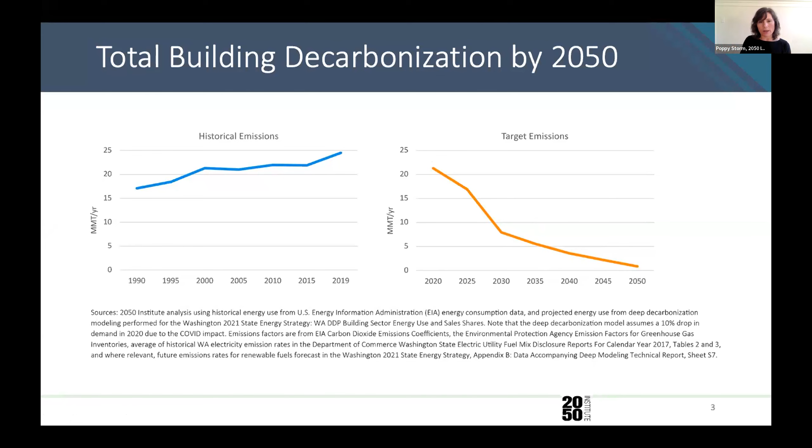And so we need really a steep ramp up in the next 30 years, and then we need to gradually replace all of the emitting equipment by 2050. So it's a big task, but we can do it if we really recognize that that is actually what the job is, and it's not incremental efficiency or half measures.

So in Washington State, we're seeing that going electrification versus the alternative, which is business as usual, or in this case of this $34 billion in savings, this is compared to going a decarbonized pipeline gas path.

So if we keep all of the lower efficiency combustion equipment in buildings, but we decarbonize the gas, that will cost $34 billion more by 2050 in cumulative terms than going electrification in buildings for space and water heating and other appliances. So $34 billion is a really significant amount, especially if it's just for one state. So this has the potential for really broad-reaching benefits.

So we really need to start thinking about it in those terms and not just be thinking about these really high first costs. We need to lower those, but we need to think about how do we distribute those costs, because we are going to be experiencing these highly distributed benefits, since most of this $34 billion is realized by individual consumers, individual housing units, and businesses in terms of reduced energy costs.

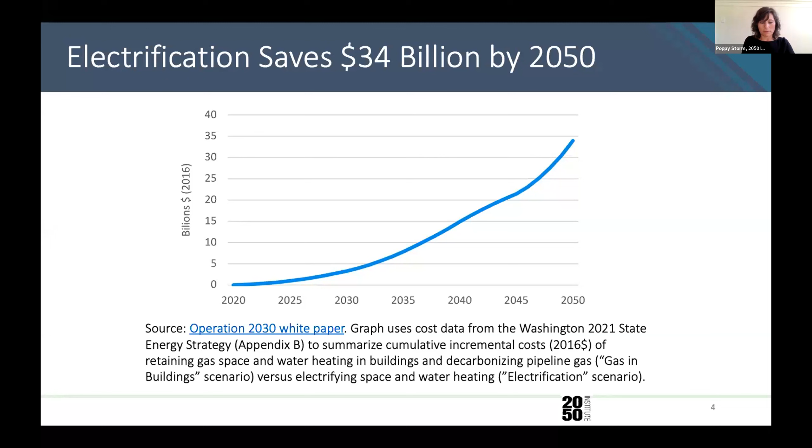So the key to this for Washington, and I'm seeing this across a lot of other studies, is that to get that building sector to be completely transitioned by 2050, the actual buildings, we need to shift the market by 2030. So we have just over 5 years to make it so that these types of strategies are the norm across the entire building sector. It can't be a niche thing anymore.

And I really don't see individual incentives getting us all the way to this shift by 2030, where every new and replacement piece of equipment is zero emissions. And in this case, it was modeled as electric equipment, high efficiency electric equipment. So we need a very big market push, and we need a whole ecosystem that delivers this.

So just quickly, I'm not going to go into the details here, but what this culminates into is that we need really clear phases. And I think we can see these phases overlapping with a lot of the other things and solutions that the other panelists are going to be describing, because everything that they're talking about is really tying into this larger transition. It's not just about how do you get it right for an individual building.

So we're really looking at getting this policy and planning platform stood up by 2025, and then a very rapid ramp up to 100% sales share of electric zero emissions equipment by 2030. And then we gradually replace all that equipment between 2030 and 2050.

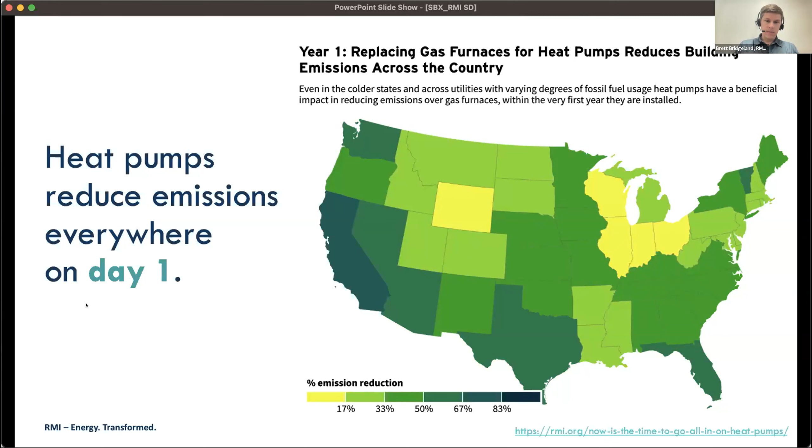Heat pumps reduce emissions everywhere across the United States on day one, in some places by a lot, in some places by perhaps more modest amounts. But the verdict is in. Heat pumps reduce emissions, and the other key part of this is that it's not just about day one. It's about how long that equipment is going to last, because that equipment's going to be in these homes and buildings for 20 plus years.

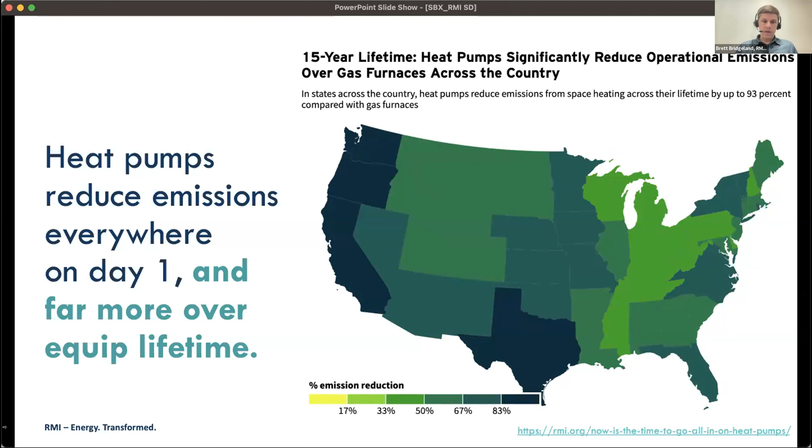And so if you look across the lifetime of emissions, even just taking a 15-year lifetime, heat pumps are going to save far more emissions compared to gas. So runaway favorite. This was looking at residential furnace replacements in particular, but assuming the same sort of efficiencies, we should see that in other larger systems as well.

The other part, as Poppy alluded to, is cost effectiveness, of course, and this is something we've been tracking, looking at new construction as an indicator. And here again, latest data is in, and what we see is cost effectiveness across all climate zones for going all electric in new construction from day one. And actually, that's on an operational cost and a first cost basis, both. So heat pumps, cost effective in residential new construction.

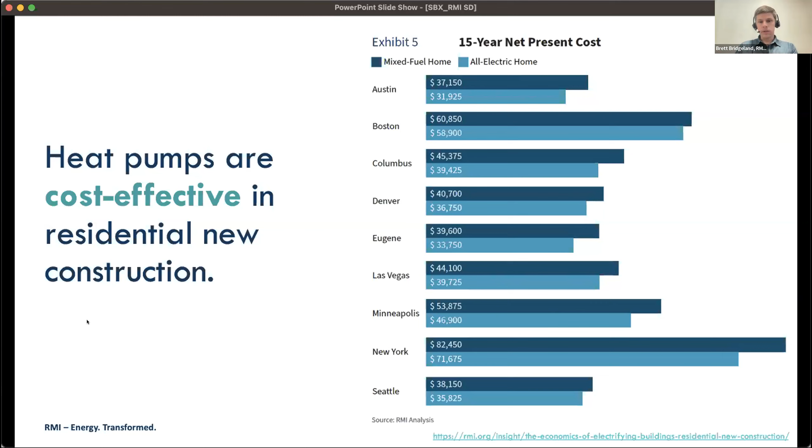In retrofit applications, it quickly becomes more nuanced and bespoke, but you can see similar verdicts when replacing expensive delivered fuels. You can see similar verdicts in situations like when you're replacing all the systems in a home. And in places like the Northwest, people are going to be adding cooling for the first time as climate changes. That's a great opportunity to think holistically and receive benefits from looking at heat pumps as opposed to split dual fuel retrofit applications.

So that was a quick snapshot on our latest on residential and top-down looks at the benefits of heat pumps. I'm going to spend the rest of my time here talking about commercial buildings, which is where I spend a lot of my time personally. There's been a lot of dialogue about residential buildings, and I think over the last year or two, commercial buildings have really come into the discussion because there are a lot more system types, and where the typology needs to enter the lexicon of planners and real estate portfolios and implementers. So starting small, small commercial.

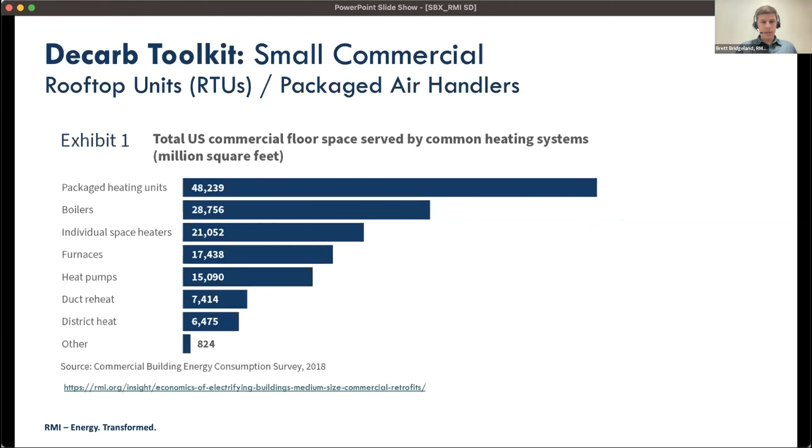This is stats from the CBECS survey, looking at the equipment stock that's out there in U.S. buildings, and that top line, packaged heating units, is by far the largest share. This is the ubiquitous workhorse of commercial heating and cooling, the packaged rooftop unit, which you see everywhere from big box stores to retail and warehouse and schools and even ventilation systems in all building types.

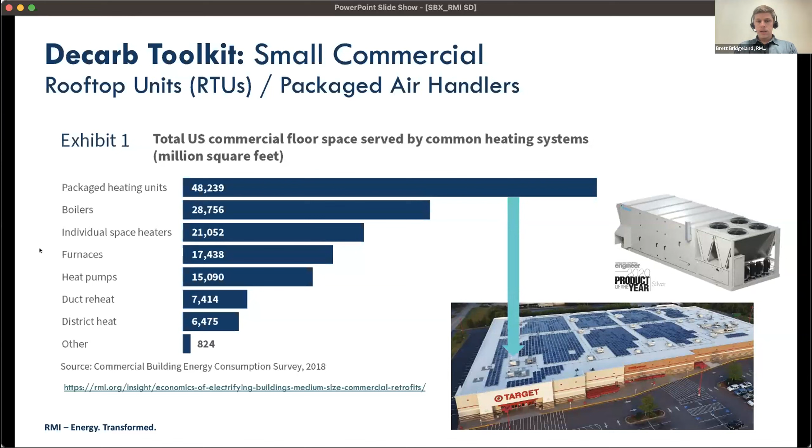So ubiquitous system types. There are products out there off the shelf that can be swapped in for gas-fired rooftop units today.

When we ran the analysis on these, the economics of small commercial electrification, what we found is that across 4 illustrative climate zones and electricity markets, gas-fired RTUs can be swapped for heat pump RTUs at end of equipment life, cost effectively. One thing I want to highlight is that depending on the circumstances, it may not be as simple as just a 1-for-1 swap out, walk away, you're done.

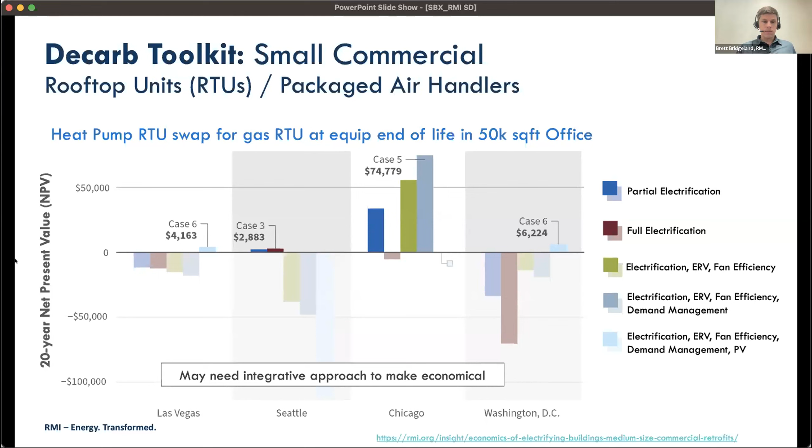It may still require an integrated approach to make it economical. So it may include adding efficiency measures in ventilation or fan efficiency to help the economics, or integrating demand management to manage peak charges, or integrating with PV. So even in the most simple commoditized system, integrated approaches may be beneficial to improve the economics.

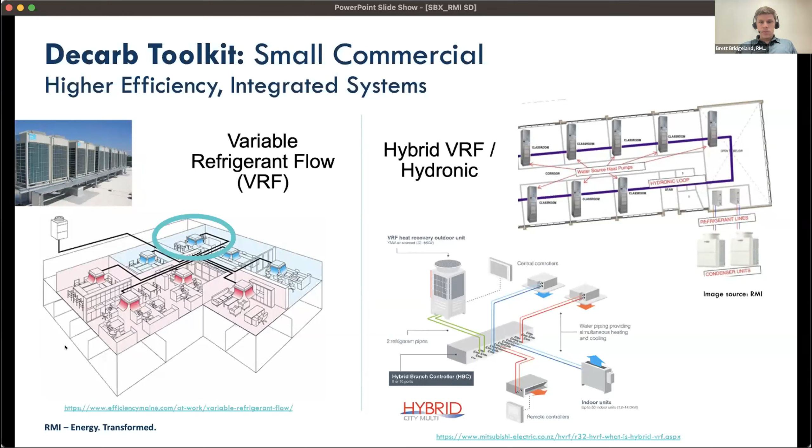On small commercial, quickly, I'd be remiss if I didn't mention that there are super efficient system options out there as well, in circumstances where you could look at a more comprehensive retrofit. So variable refrigerant flow, or there's a version of that called hybrid, which takes the refrigerant out of the lines in the building and uses water to move heat around. So in instances where a more holistic retrofit is possible, there are even more efficient systems.

Okay, so moving up a scale to large commercial buildings, the dialogue often goes quickly to this: what's the equipment, where's the heat coming from, the heat generation? There are different components: larger VRF systems, air to water heat pumps, ground source heat pumps, heat recovery chillers. These things are good; they're definitely part of the solution.

But there are challenges and opportunities as we move into these larger building types. Many building types run on high temperature hot water or steam, and the distribution systems within the buildings will also require work. Making those transitions can be disruptive to occupants and tenants. In larger buildings, you have to think about where your heat sources are, how much roof space you have for heat pumps, how much mechanical room space, and of course, the big capital investment.

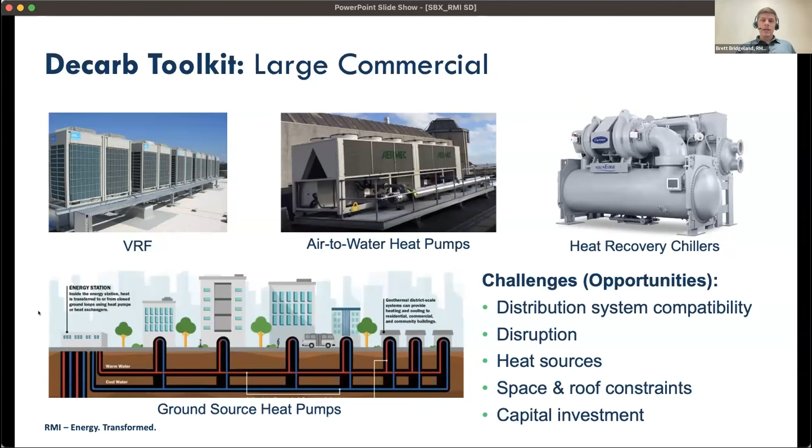So the answer to this that we're starting to see from some leading practitioners, real estate partners, and programs is this approach we're calling strategic decarbonization, which, rather than jump to that last bar on the right, the full electrification, thinks about the steps to get there, which enable it and make it possible and feasible and beneficial.

And those steps include reducing loads. We, as an industry, have been talking about efficiency first for 40 plus years, so that's part of it. There's also an element of reconfiguring systems in buildings, sometimes moving to water-based hydronic systems, which is an opportunity for both efficiency as well as heat recovery, which is the next box. So recovering heat, I'll come back to that in a minute, from all the sources that are possible.

And then talking about the heat generation side. Here again, there's a lot that can be done immediately with relatively modest investments in buildings, so that partial electrification can realize 80% electrification of loads with pretty good economics, using different heat generation sources. And then that full electrification, the design condition, which happens a few hours of the year, can be solved deliberately, potentially in different ways, potentially over time.

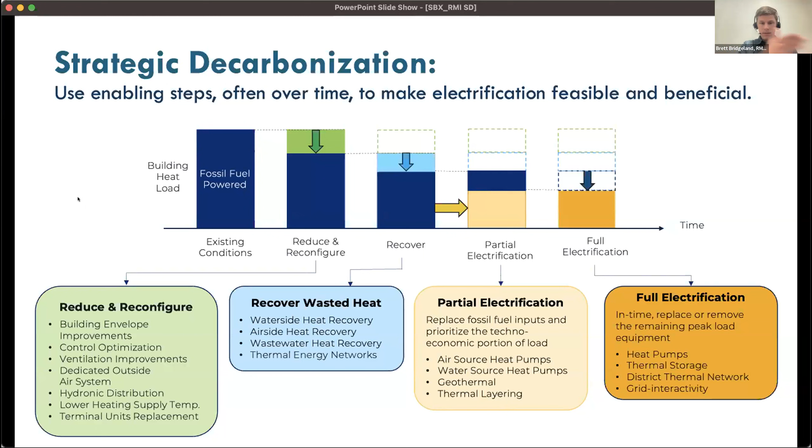So this enabling approach is what we're calling strategic decarbonization. This is emerging work that we're doing in New York, where NYSERDA, the state's energy office, is running programs to help large and tall buildings specifically figure out one of the more challenging aspects of building decarbonization, how to decarbonize these building types, across both commercial buildings and multifamily buildings.

I'll highlight the one all the way on the right, Hudson Square, a really interesting project where they're going to turn over tenants over the course of, I forget, a decade, in 3 phases. What they're doing is running a new hydronic spine through the building, and then as tenants roll, they're going to plug into that system, which is fed by heat pumps and heat recovery on the roof. So it's a phased approach that matches the asset life cycle and tenant management cycle. Really exciting, replicable approach.

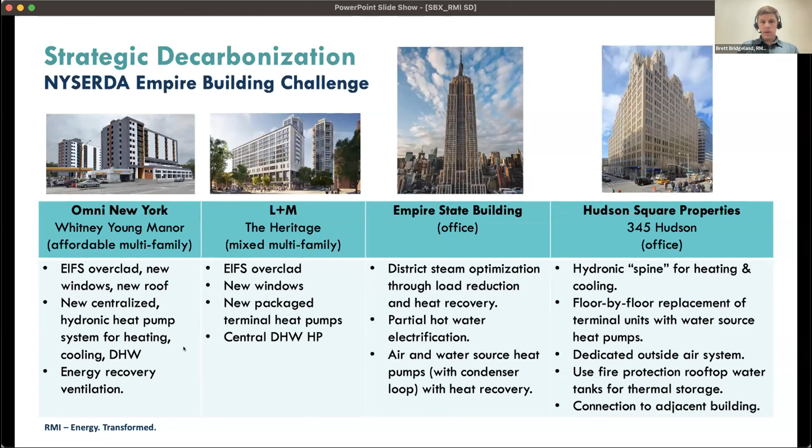And before we go thinking that this is all just happening in New York with NYSERDA funding, this is happening in King County too, a really exciting thing that we talk about in New York. We'd love to see this replicated elsewhere.

Sewer heat recovery. There's an opportunity in urban environments to recover heat from municipal sewer lines, or even within multifamily buildings themselves. This is a really interesting leading project nationally and a great solution for

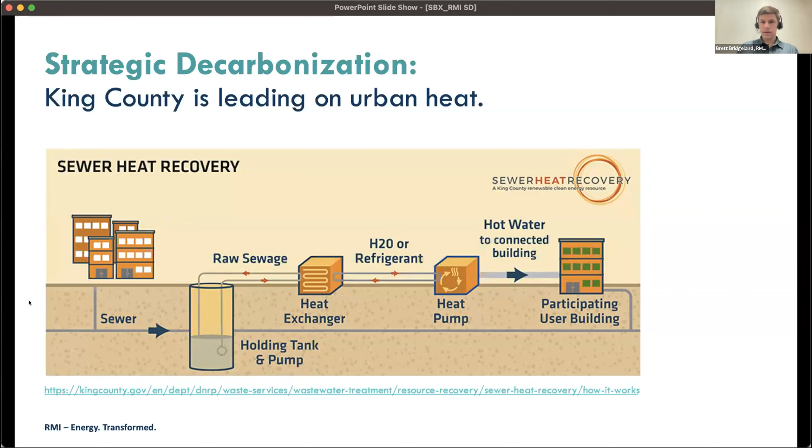urban heat sources. Another example - so those are individual buildings, but scaling up, we had an engagement with Canada's National Capital region, looking at their federal buildings, about a 60 million square foot portfolio.

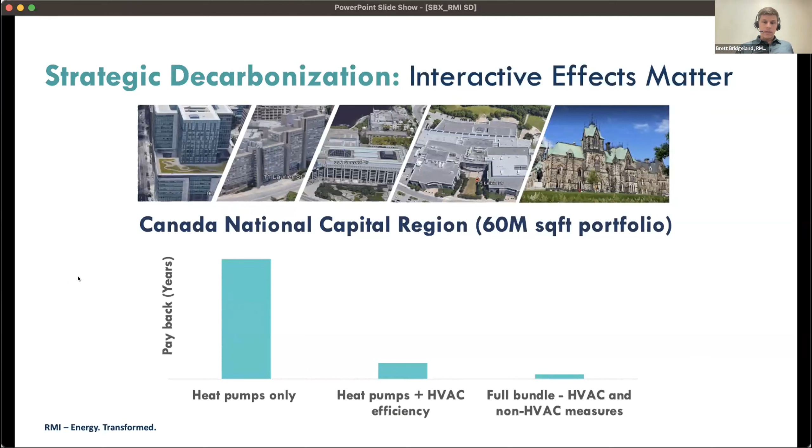One thing I want to highlight here is that in strategic decarbonization, those interactive effects matter. So heat pumps, just a simple swap out, had a prohibitive payback, but integrating efficiency and then even non-HVAC measures brought that to a reasonable

payback. And the other part is tying this to triggers rather than investments apropos of nothing - whether it's equipment end of life, repositioning, or recapitalization.

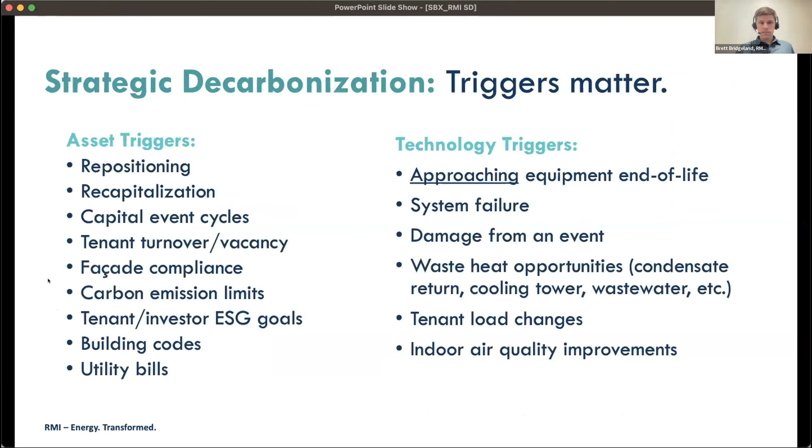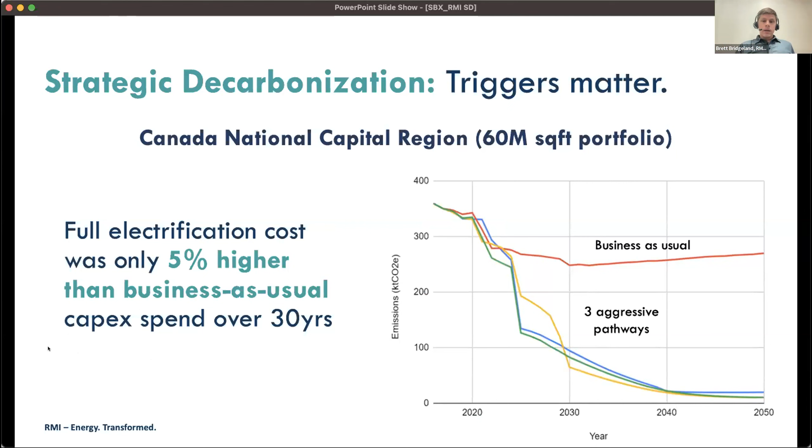And in that Canadian example, what we saw is when we do things on triggers that make sense in the asset's life cycle, the incremental cost was only 5% higher than business as usual to get to complete decarbonization over 30 years, which was their time frame. So a positive look there, when we tie to triggers and take a portfolio over time approach.

And the question, which I think we'll get into in the discussion, is how do we scale this? Because globally, 70% of buildings are still going to be here in 2050, probably even higher - this is global, so even higher in the US.

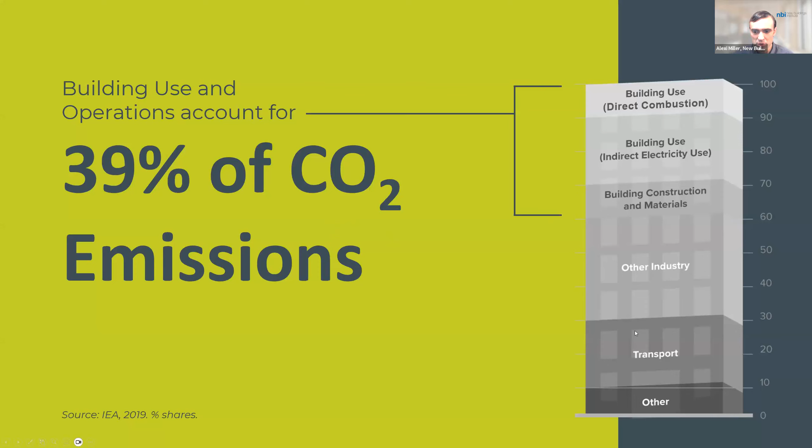And of course, it's the smart buildings topic that we're focusing on today. So I'd be remiss in not pointing out that the grid exists to serve buildings. Our electricity system here in the US, about 3/4 of all the power we generate goes into a building of one type or another, even more in peak conditions. So we've got this fantastically complex, amazing machine that is our power grid, and it's serving these buildings.

That's mostly what it's here to do, where of course we spend 90+% of our time. And so that's why buildings are so central to

decarbonization solutions. Why such a focus on decarbonizing buildings? Well, I think it's maybe a misattributed quote, but Willie Sutton, the bank robber in the 20s-ish, was quoted as saying, I rob banks because that's where the money is. Well, we decarbonize buildings because that's where the carbon is. So apologies to Willie if that's misattributed, but that's really the point, right?

Find where the carbon is and go get it. We know we need to do it. We know where it sits. And so then the question is how?

Where is this greenhouse gas coming from in buildings? Broadly speaking, we're talking about space heating, water heating - mostly those two. And then there's some other stuff - cooking, laundry, direct use in other ways, process loads, right? But the big two are space heating and water heating.

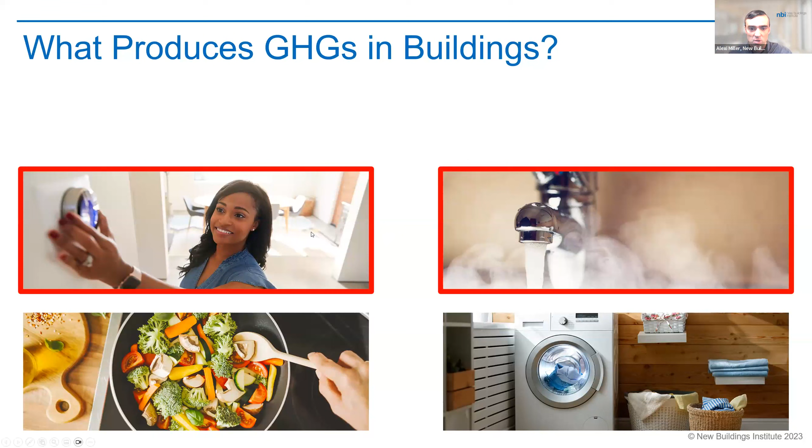And so the answer is more or less spelled heat pumps. There's other stuff too, but when we're talking about decarbonization in buildings for those two big loads, space heating and water heating, we're mostly talking about heat pumps, which is - I was gratified to see Brett really focusing on those because that's the big deal.

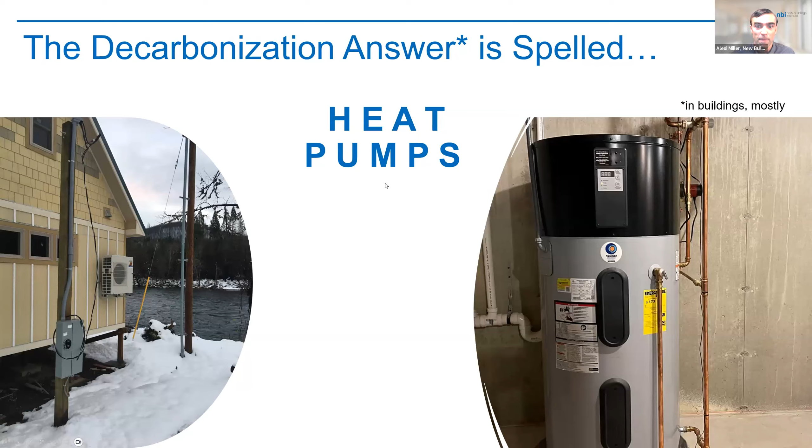How ready are these key solutions? Basically, we know how to do this. The story of decarbonization is largely the story of heat pumps. Heat pumps for nearly every application are ready to go. They're available off the shelf. There are some cases where they've still got some ways to go and there's some improvement to be made, but for the most part, the products are there.

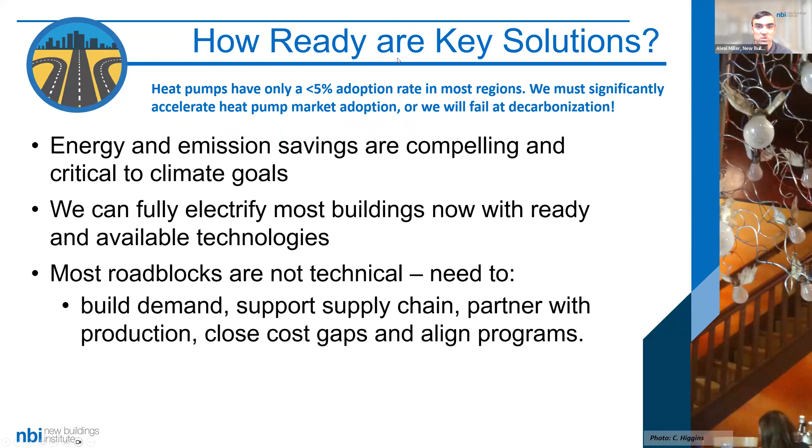And now we're talking about the other roadblocks. We need more demand from the building industry side. We're going to make sure that supply chain is robust, that manufacturers have the confidence they need to really scale up production to meet a higher demand. And of course, we've got some of those alignment issues we've heard about already and incremental cost gaps. But we're talking about a big scale, right? We're talking about moving from maybe a 5% adoption rate to getting toward 100% adoption rate in a short timeframe. So it really is all about scale.

And I want to give a couple of specific examples. There are some silver bullet product types. For example, the heat pump water heater. One of my roles at NBI is to oversee a couple of our initiatives, one of which is the Advanced Water Heating Initiative, AWHI. It's all about bringing heat pump water heaters to scale. And the reason we're focusing on this particular technology is it really is one of these silver bullets. It combines three key value streams. They're very high efficiency. Heat pump water heaters are 200, 300, sometimes 400+ percent.

More efficient than the baseline gas burning or electric resistance water heaters they replace. Of course, they're all electric. And so the energy coming into the heat pump water heater can be cleaned up at the grid scale, whereas it's very difficult to clean up the gas network in the same way. The solutions really just are not scaling like they are in electricity.

And then, of course, they're smart. Heat pump water heaters are by nature thermal energy batteries. They are energy storage devices as a big tank of hot water. And generally speaking, heat pump water heaters come smart by default. The chips are there to be able to participate in smart grid programs, and the incremental cost to make sure that they've got that communications capability, which is a future-proofing element for buildings, right?

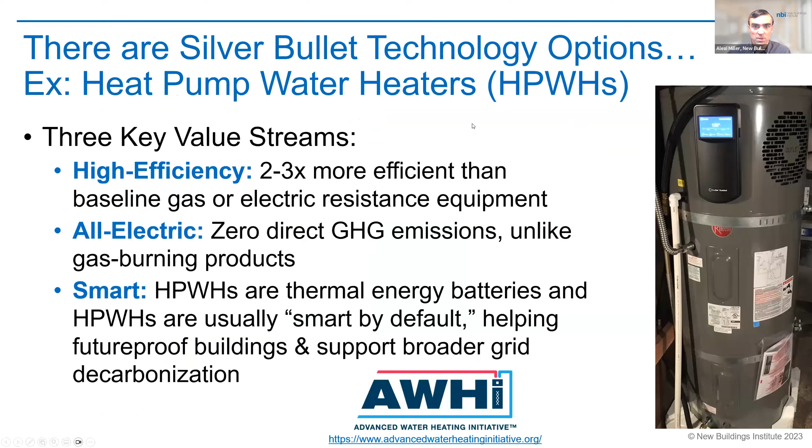But there are more products coming. For example, plug-in retrofit ready 120 volt heat pump water heaters, which are a really important retrofit technology so that you don't have to upgrade electrical capacity, put in a new circuit, et cetera, to serve a 240 volt line. If you're previously running off of just gas, you could just plug the thing in. There's some interesting product classes, 120 gallon commercial units that can sometimes be ganged up.

We've got these skid-mounted central systems like this one up in Bayview Tower in Seattle. And of course, there's new stuff coming, with really strong support from the federal government, seeing new work on form factors, which is to say shapes, right, to fit into different configurations, updated refrigerants that have lower global warming potential, better connectivity on these different systems, all kinds of cool stuff, right? So it's a silver bullet technology as it stands now. It's improving in terms of efficiency, performance, and all the bells and whistles.

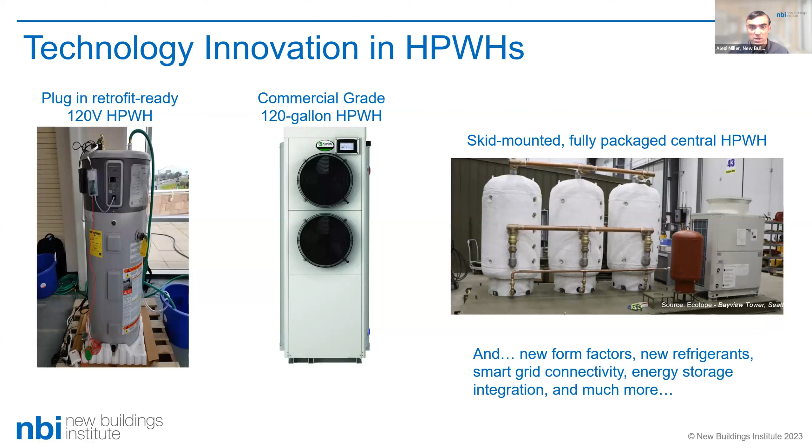And that's an example of where we need to go. The key thing is it's got these multiple value streams coming together: efficiency, electrification, smart, and you see multiple value streams on the building scale. So that's an example of a technology. I want to give a little example of a project that I think is really relevant in terms of tying together these multiple value streams, because that's how I think we can succeed in really scaling this, by making sure that we're not only focusing on the payback in terms of energy costs from a decarbonization project, because if done right, they should be much more than just an energy savings project.

So this is an affordable housing development in Vermont. New construction, affordable multifamily built in 2016, several years back. It's 14 homes, around 1,000 square feet apiece. They're all electric and include very high efficiency equipment, heat pumps, of course, for space and water heat.

And it's Vermont, so it's cold. It's a case in point that you can do this in basically every climate we have. And then they also include energy storage, that is to say batteries, and rooftop solar. The really interesting thing about this project is the layering of the efficiency, the equipment, the DERs, the distributed energy resources.

And the smart component of them enables us to get this multi-value stream. It's what I like to say is a win-win-win proposition. We've got occupants, that's a win for them. They're paying $5 a month average on their energy bill in Vermont. So remarkable cost savings for the occupants, which is really important. That lowers their energy burden.

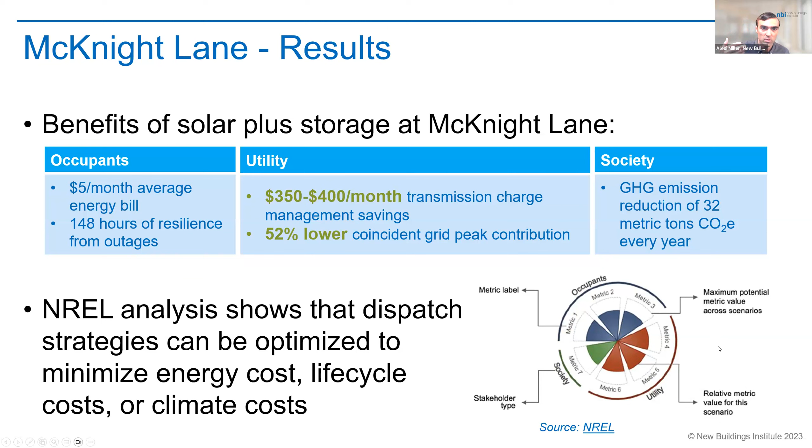And so you can say, where is the best fit for this? And NREL actually created an open source tool to help develop that. Figure out what are our priorities, how do we do this multi-priority optimization? So that's that kind of win-win-win solution that I think is really going to help us scale this up.

We really do need to scale this up. We know what to do, broadly speaking, in buildings. It's, as I said, spelled heat pumps. It's ready, it's available today. As we've seen, the economics are already scalable, but getting better fast, thanks to the IRA, the infrastructure bill, other federal legislation, as well as state policy.

We really do need a significant focus on bringing down those upfront costs. Like it or not, most people in our current economic construct don't really think in life cycle costs. We're talking about first costs in a lot of cases. And so we really do need to bring those upfront costs down in terms of the equipment and of course the labor.

But I think it's got a lot to do with finding these multi-value stream opportunities, these win-win-wins, so that we can equitably deliver improved energy efficiency, we can cut those operating costs, we can really deliver on improved resiliency. A lot of times that may be the driver that gets people to actually do the project. It may be a decarbonization project, but if they think of it as a resiliency project, onward and upward.

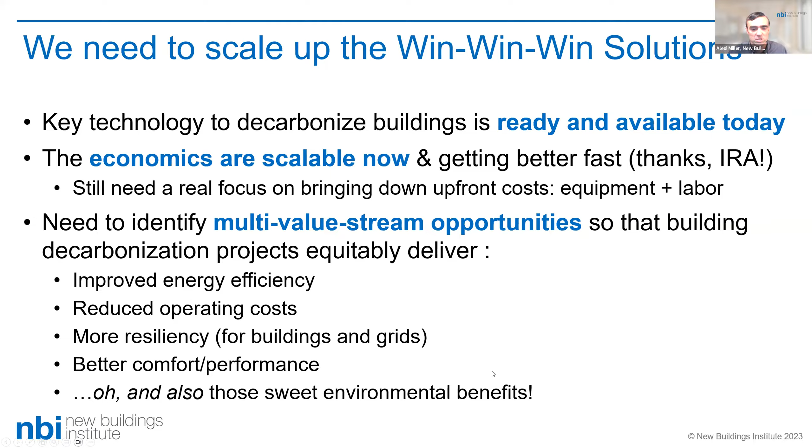And of course, we want better building outcomes, better performance, better comfort. And we can still get all those sweet environmental benefits. So thank you.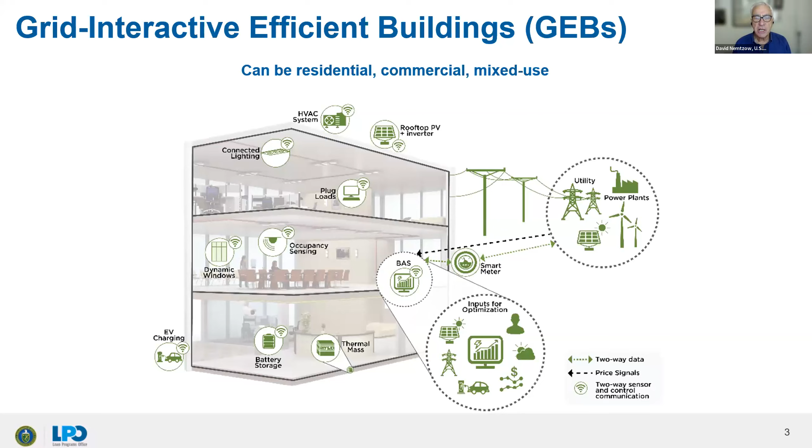So I think you all know about smart buildings, of course, and I know there is a separate session on grid interactive efficient buildings. This is just to remind you how many different forms of smartness there are in today's residential and commercial buildings. So first, to scale it up, we do something.

And by scaling up, we have a better chance of making sure that if technology isn't appealing to one end user, it'll be appealing to enough other end users that it can be used as a whole. So that's the kind of scale we want. So it's not just bigger numbers, but it's more reliable. And that's going to invite my definition of what is a virtual power plant. So I'll let you read that for yourself.

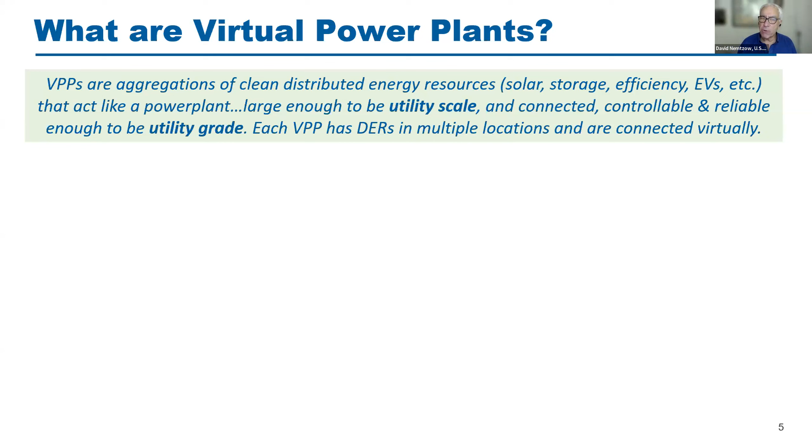But the key point I want to make here is that if you want to ask what's the difference between a virtual power plant and just a lot of distributed energy resources, whether that's solar or storage or energy efficiency or demand response, the difference is that by being large enough, it can be utility scale, tens and hundreds of megawatts instead of tens of kilowatts. And more importantly, it can be connected and smart enough and controlled enough to be considered utility grade. It's not a power plant, but it can act like a power plant.

And I'll just click through here and let you read it for yourself. On the left, these are the aspects. They don't have to be physically co-located. Again, that helps us scale. They can respond to all sorts of signals. There are a lot of different benefits depending on price signals and regulatory and market signals. There may be aggregators involved; it can be done by third-party aggregators, by utilities, by OEMs who want to aggregate up, et cetera.

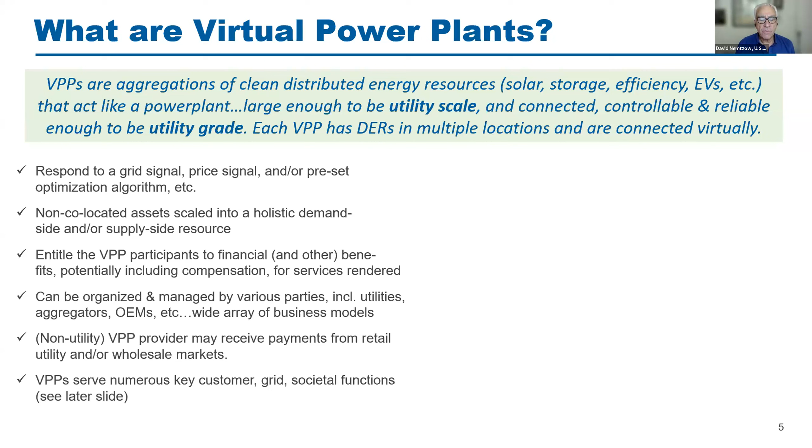And there are a lot of advantages. I'm going to focus on decarbonization and electrification today, but they also can be very essential for resilience and reliability. We're very open-minded at DOE as to what technologies qualify. I have a graphic version of this in a minute. We want to be inclusive as to the different distributed energy resources that qualify as a virtual power plant. And so again, they're utility scale and utility grade.

My office is driven by applications. And we'll have a new report coming out, by the way. I want to give you a heads up; when it's available, I'll ask the Smart Building Center and the Exchange to share it with participants in mid-September, a commercialization report for virtual power plants. But when we look at virtual power plants, what we want to do is include all these resources.

In my office at LPO, we provide financing. So if any of you were to come in and say, hey, David, I want to do a virtual power plant that's a mix of, I don't know, pick your numbers, 50,000 homes with PV and storage and demand response software, and I need to borrow $500 million, then we can talk.

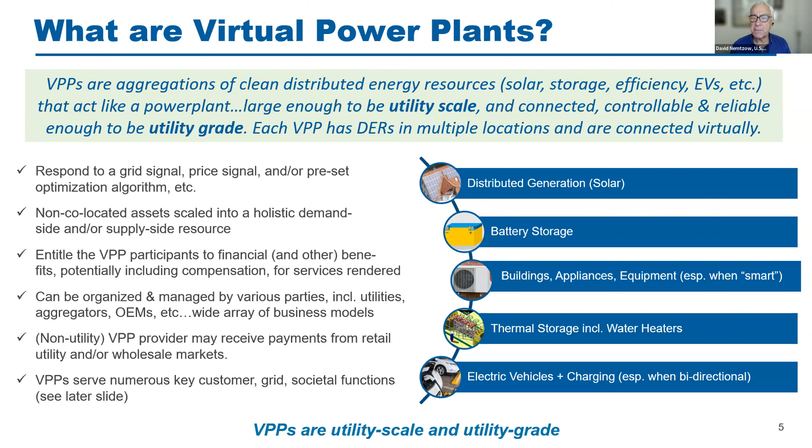You want to borrow $2 billion, we can talk. Our most recent loan guarantee was to Ford for $9 billion. And so we can well get into the billions. Most virtual power plants are smaller, in the hundreds of millions and billions. So just want to give you a sense of excitement.

Of course, if it was all that simple, I wouldn't be here, I wouldn't need to have this conference. Life's more complicated. So not every utility has the right incentives for DERs, of course, let alone for virtual power plants at scale. There's still a perception after all these years, Stan Price, among utilities and others, that DERs, including virtual power plants, aren't reliable enough for their needs, which I find to be a joke, frankly.

After we saw what happened, we see that even traditional resources, power plants and others, they're not perfectly reliable either. Yet nobody seems to be as bothered by those. Reliability comes in many forms. We do need to standardize data access. We need to have the regulatory mechanisms at FERC, but mostly at the PUC level.

We don't want to leave out low and moderate income households or other disadvantaged Americans from the clean energy revolution or the VPP part of it. And we want to make sure that commercial lenders understand all of the above so that they can make reasonable ratings. That's a role that LPO in particular plays in.

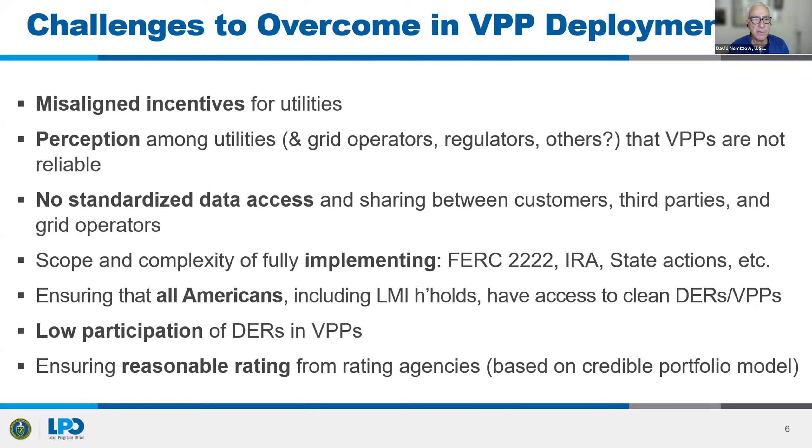Here's the picture version. Again, they come in many shapes and sizes. And even though it's a conference on buildings, you can see there, including a bidirectional EV, the F-150 Lightning. And the node, of course, is the home. Swell and Hawaiian Electric have a virtual power plant actually in Maui going on. And virtual power plants can include any or all the above.

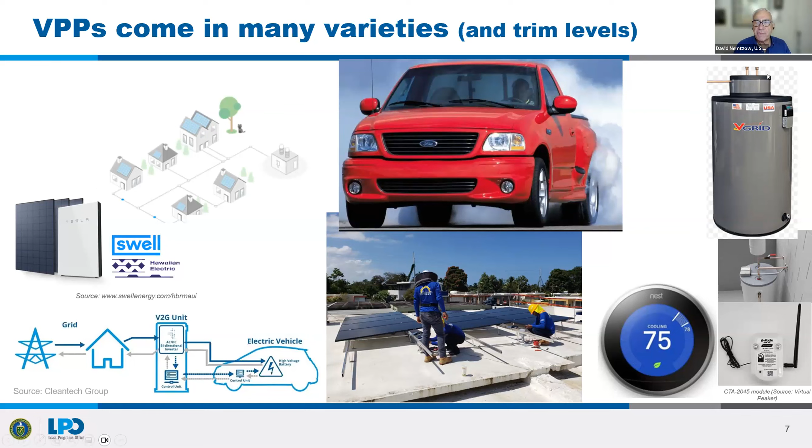And of course, we already talked about heat pumps, and we can use, of course, smartness to be aftermarket with radio controlled devices, or of course, it's better if they're built in from the get-go.

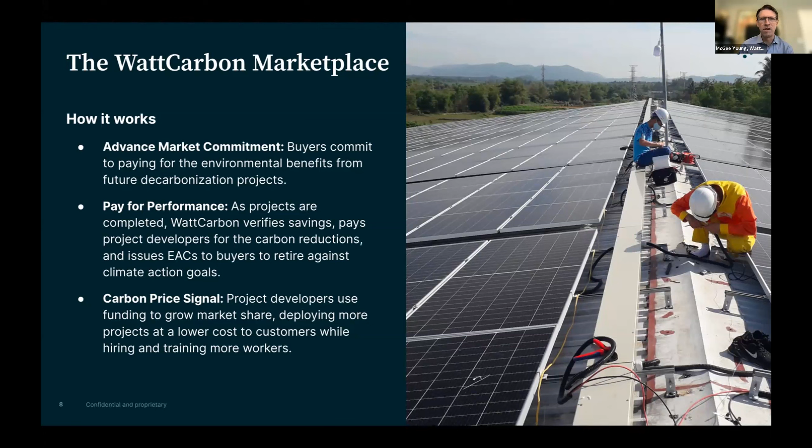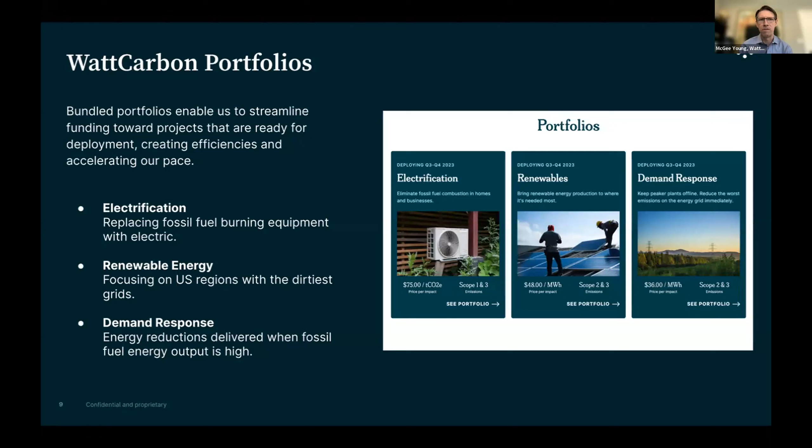With distributed energy resources, everybody knows it is a lot to try to negotiate individual offtake agreements around. So we've reframed this to think not about buying the carbon reductions from any one given project, but to aggregate projects across similar types of approaches, so electrification, renewable energy, demand response, so that we can bundle together large numbers of these projects and reduce the risk of any one project for somebody who's coming in and financing these portfolios. This again creates the efficiency we need to achieve the speed and scale required to decarbonize buildings.

A couple of other really important parts of this: equity. We have to be thoughtful about both the impacts of our carbon-based economy today on local communities, as well as making sure that we don't impose burdens on communities differently. We can't just put heat pumps in rich neighborhoods, but we also can't not put solar panels on poor neighborhoods. And how do we make sure that it's distributed across the United States so that where the utility isn't very motivated to help provide incentives, we can still make sure that they can participate in the energy transition.

And then, of course, measurement and verification. We've got smart meters across most of the US. A lot of the work that's going into buildings includes the ability to monitor and measure equipment impacts. There's no reason that we shouldn't be measuring this stuff with incredible precision and accuracy, so that we can be confident that the money we're spending is actually going to achieve the results that we desire.

And finally, additionality. This is the idea that there's a lot of free ridership maybe happening with traditional rebate programs. It's all of us who are at this conference today who participate in utility rebate programs. We're already going to do this stuff anyway, but we kind of like the extra money that comes along with taking advantage of a rebate. And I suspect that most of us at one point or another have taken advantage of some of those utility rebates. But what we really need is scale.

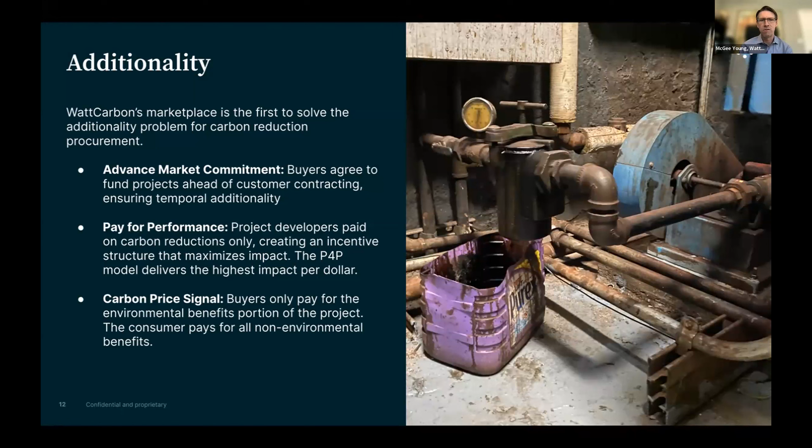So this hopefully sets the scene for quite a robust discussion, getting us - Poppy has prepared a bunch of really great questions for us. I'm sure there's a number coming in from the audience. Really looking forward to continuing the conversation with the rest of the panelists. Thanks for having me on today.